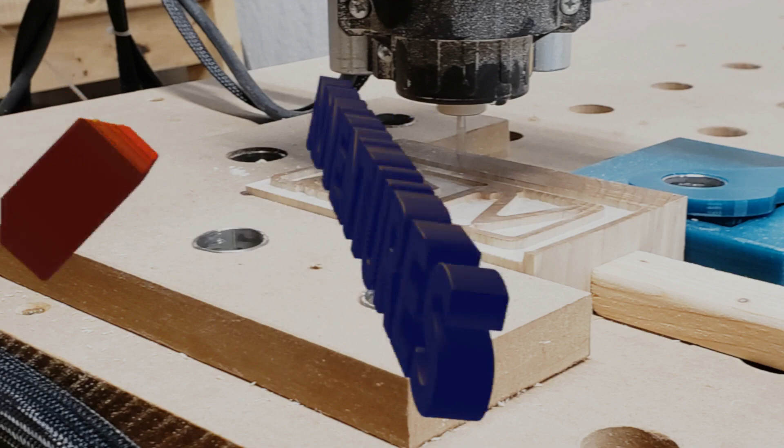In this video, we're going to take a look at making some finger joint boxes in Fusion 360 using a script that I've written to automatically generate the sides so that we can create the CAM and make them on the CNC. So let's take a look.

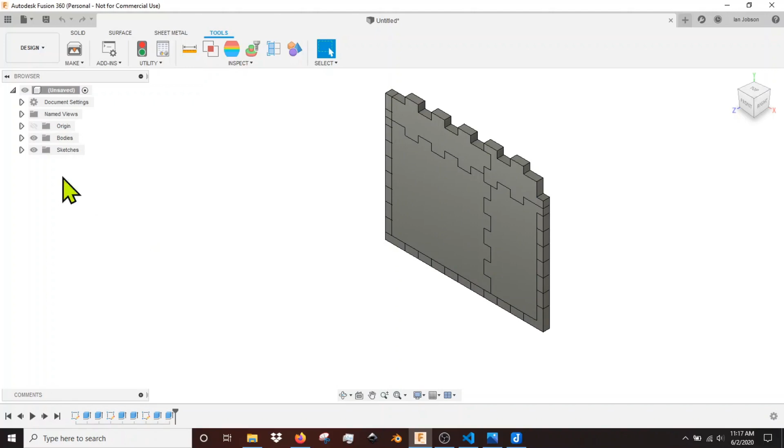I completely rewrote the script because I wanted to do some different things, and I wanted to make 3 separate sketches with 3 separate models in it, and that's what we have now. So as you can see, once you input all the parameters, the script will create 3 sketches and it will create 6 models, 2 models of each side from the 3 sketches.

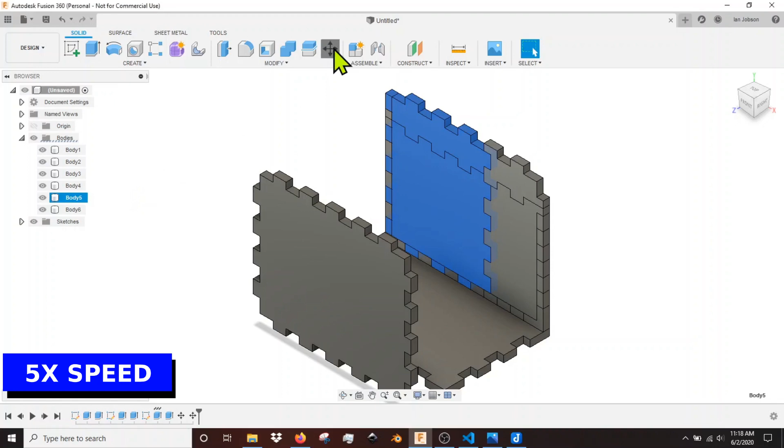So now we have the sides, we can apply the dog bone. Remember, the dog bone is a separate add-in. I'll put a link where you can get that below. When you add the dog bone, it's going to show up in your add-ins. When you run it, all it does is add it to the menu.

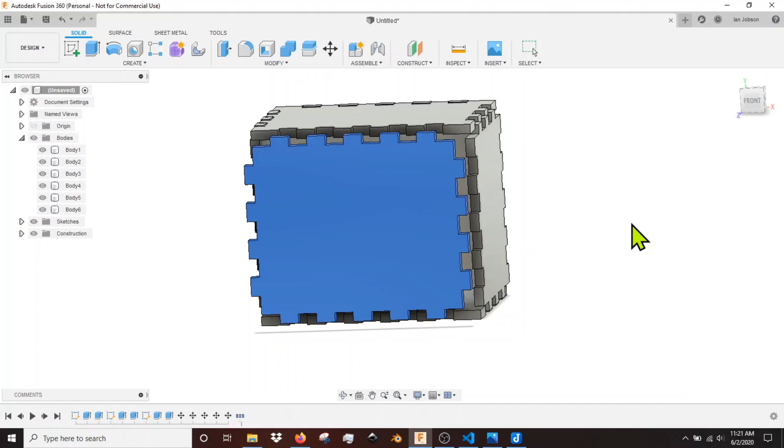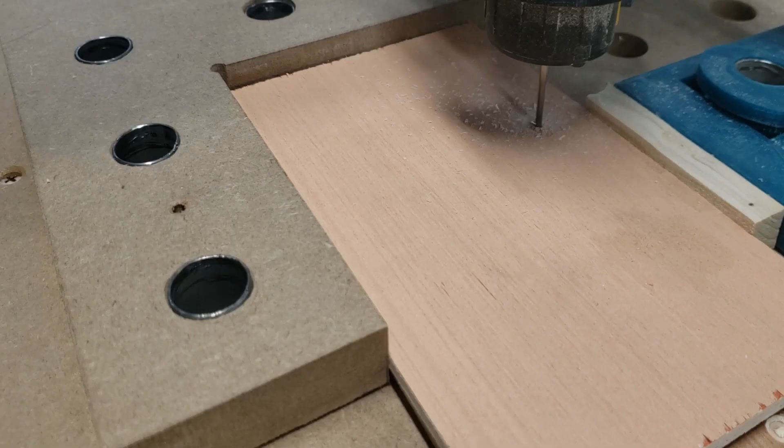It doesn't actually do anything until you click it on the menu. So just be aware of that, so you're not waiting for it to do something and it actually doesn't do anything. So you can obviously take each piece and apply the dog bone. You only need to do it to one of each side type because you're going to make the CAM parts. You'll just make 2 of each side.

If you're interested in seeing how to create the toolpaths in the CAM portion of Fusion 360, leave me a comment below and I'll be more than happy to make a video to show how to do that. They're pretty straightforward, and it worked out pretty well with the little tabs that I put in them.

So this is a look at an unfinished box right off the machine. I didn't sand anything, I didn't file anything. I just pushed the parts together to see how they fit. I did just take the burrs off the edge with the scalpel just so that there weren't pieces of wood sticking in the hole, but other than that, it's not really finished.

To install the script then, make sure you're in the design workspace. And then from the top, select tools. And as you select tools, you'll see the options for scripts and add-ins. It opens up by default on the My Scripts part. You click that little plus, and then it will default to some obscure directory that is way deep down in the Fusion 360 files. So I just go back to my documents, pick the directory, and then put the script in the one that I want.

The only rule there is to that is you can only have one script in the directory that you select, and when you select the directory you can't see any scripts, but if there's more than one script in there it won't work. So you can only have one script in the directory. Select that directory. When you close it, it will pop up on your list of My Scripts.

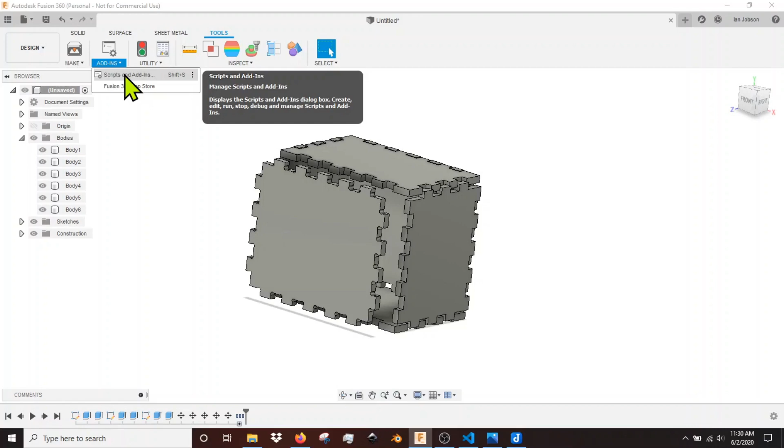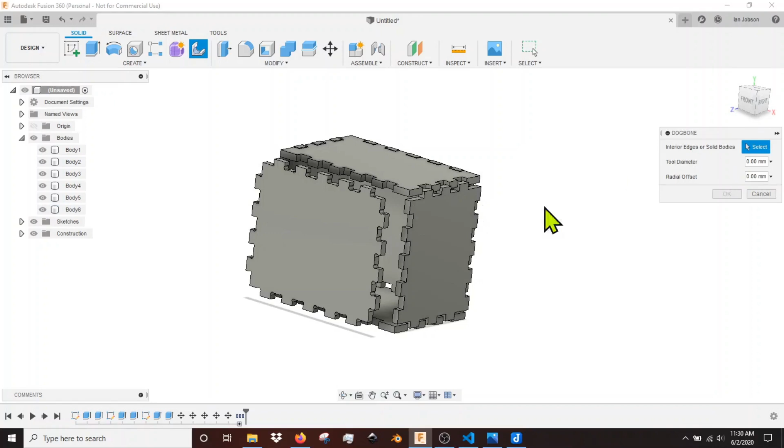Just to reiterate then, with the dog bone add-in, when you install the dog bone add-in, you run it, and when you run it, it's not going to actually do anything, but it will load a dog bone icon on your menu. Then to run it, you can either click that or go to the bottom of the create menu, and you can run the dog bone add-in from there, and then you select your side and just go through all that normal selection to create your dog bones.